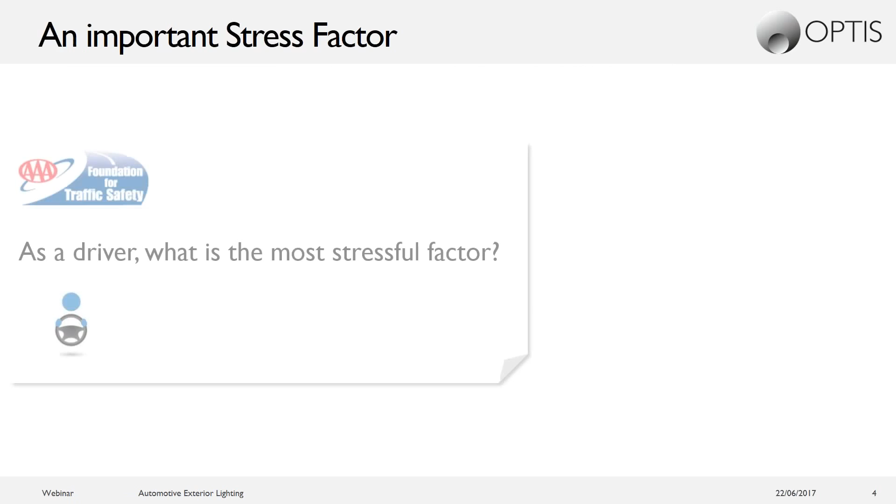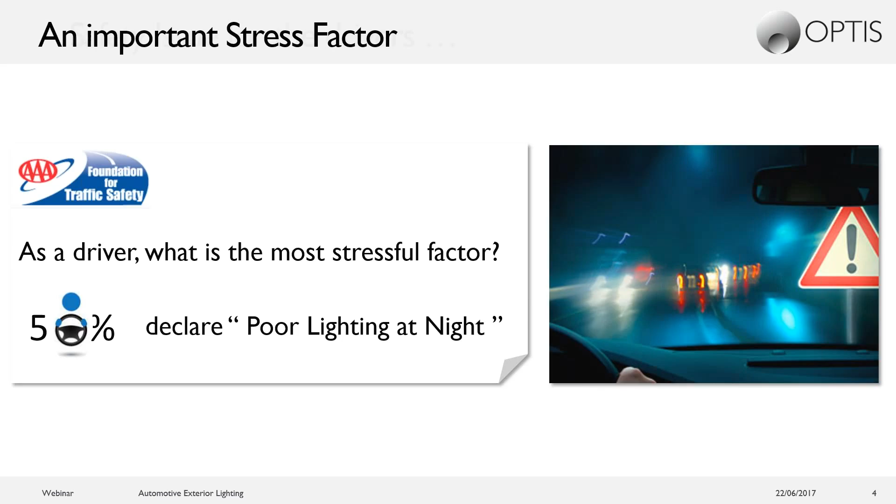Night driving is an important stress factor. In a recent American driving survey, to the question, what is the main stressful factor for you on the road, still 50% of the drivers mentioned that the first and most stressful factor is the poor lighting at night. So intelligent, innovative exterior lighting systems need to bring comfort at night. Exterior lighting has to answer to the huge safety issue that night driving still represents nowadays.

National Highway Traffic Safety Administration reports that only 20% of driving distances is undertaken at night, representing 2.4% of the traffic volume. But in this period, 40% of fatal and serious injuries are sustained by drivers. It's 4 of every 10 teen crash deaths that occur at night.

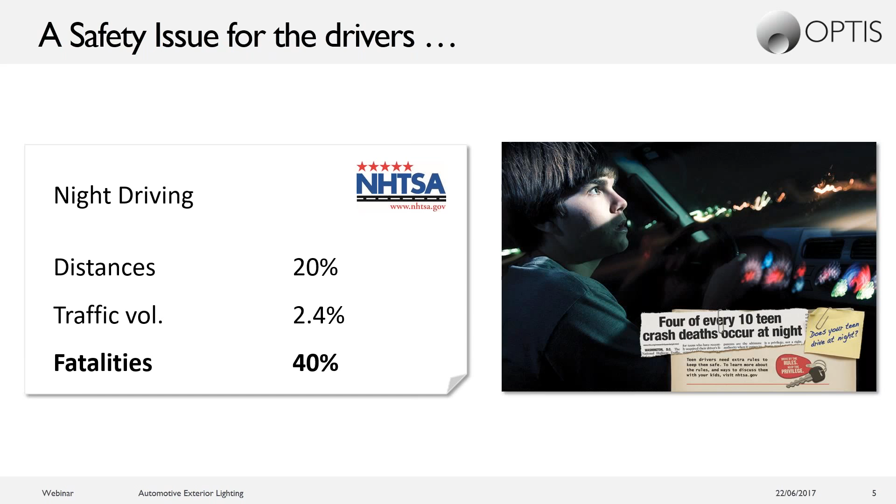Actually, the nighttime is a safety issue for all road users, especially the vulnerable road users, a heterogeneous group of pedestrians, cyclists, younger and elder, and disabled people. European studies have highlighted the strong effect of lighting levels on fatal crashes of vulnerable road users, being 3 to 7 times more vulnerable in the dark than in the daylight. So innovative automotive lighting needs to improve the safety of these vulnerable by communicating, by alerting, warning with lights.

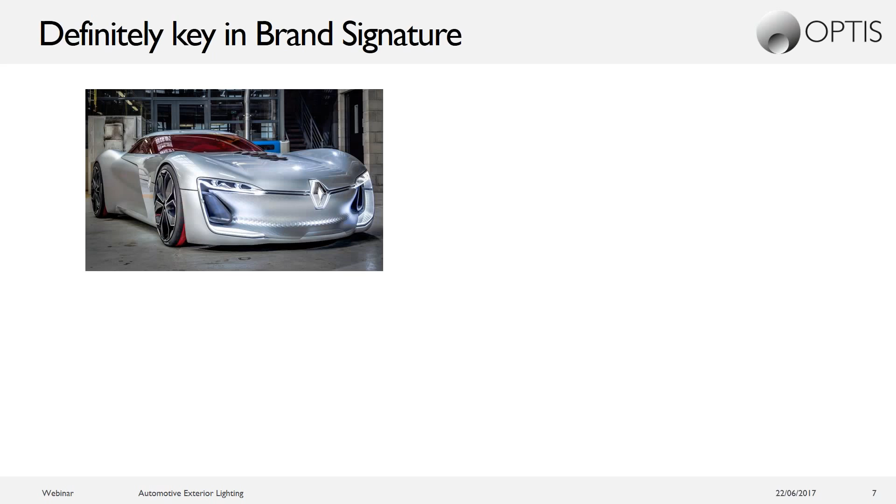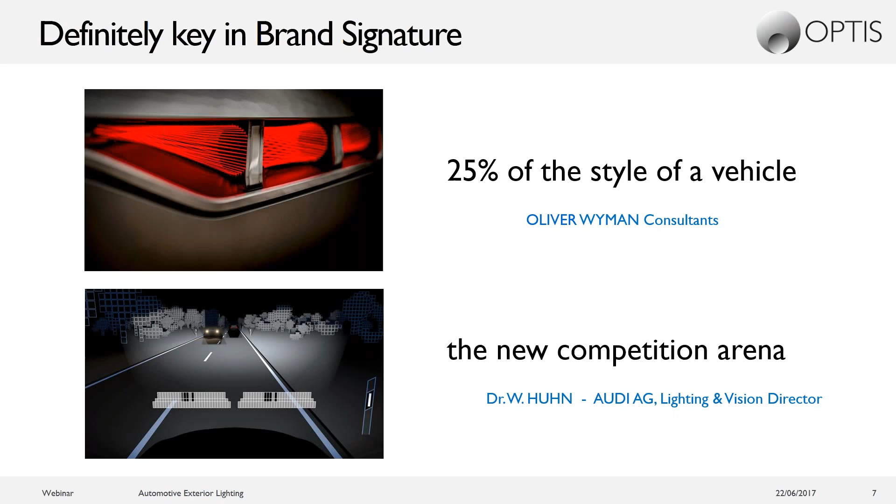Finally, exterior lighting represents also an aesthetic challenge. Exterior lighting reflects today the brand signature and a major impact on the customer perception, estimated to represent by itself 25% of the style of a vehicle. This is the new competition arena for car manufacturers and tier 1 suppliers. The competition is on shapes, on materials, light technologies, and their performances. The engineering development time is doubled at each headlamp generation. I will now let Julien, the manager of Automotive Exterior Lighting, go deeper into our solution to address all these challenges.

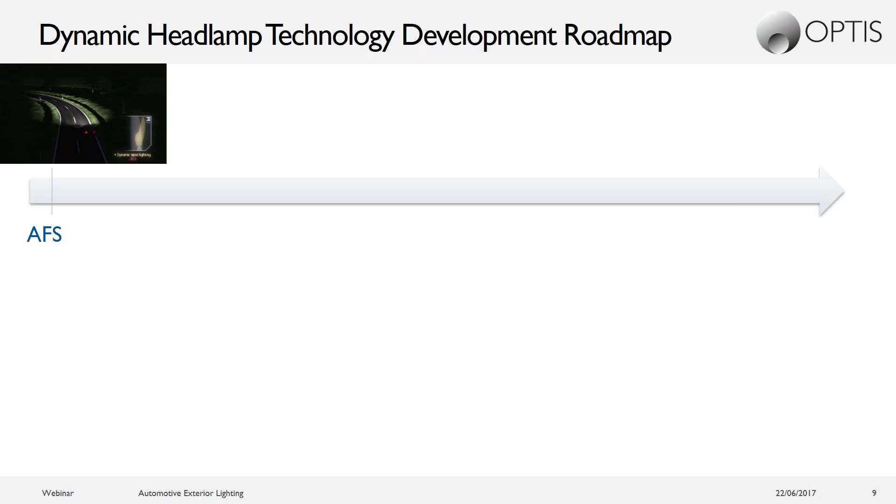So hello everyone. So today I will present you the pixel beam technology and evolutions, but first I will start with a brief overview about the last decade to look a little bit at the latest evolution in automotive lighting. So first I would say 50 years ago, or maybe even longer, with the first Citroën DS. It was the first AFS with a low beam turning with a steering wheel. This is still not a standard feature for all the cars, it's still proposed as an option on the high-range cars, but this allows a big improvement for the safety of the driver. So the idea is to add some light in the curve by using the steering wheel or the speed.

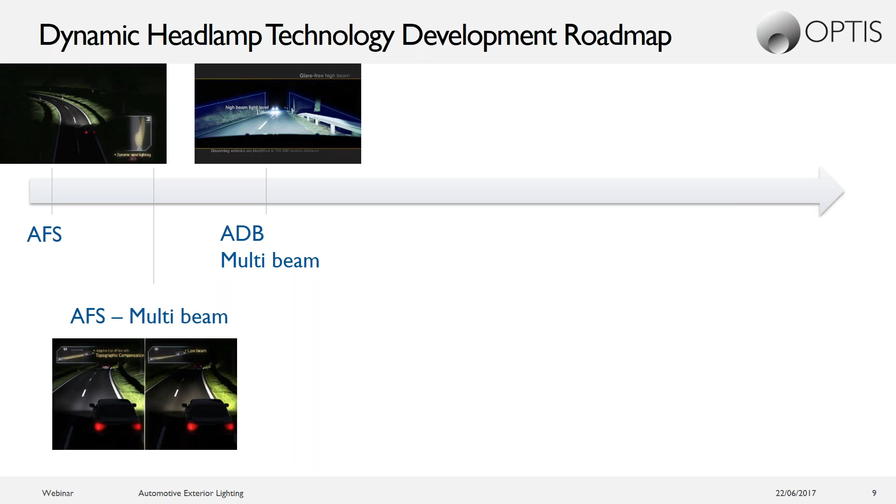Another solution could be also to add light depending on the condition, depending if you are driving on a motorway or if it is raining. You can adapt the lighting to have a better driving situation. And ultimately, you can have an adaptive driving beam, so we call it ADB. So the idea is to use the camera to control your lighting system. And at that time, with that technology, by using xenon or even LEDs, you have an L shape creating a dynamic shadow at the center to avoid glaring the oncoming driver or the preceding cars. So basically, all these three solutions are quite mature technology. It's based on mechanical movement, but it really allows automatic driving, so really to drive safely during the night.

Recently, we have seen the matrix beam coming thanks to LEDs, so you can add light even between the cars. So some pixels can be lit even between the cars, so you can put a lot of light everywhere. But you can still see some shadow on the road, so some light is still missing. Sometimes you need to switch off some pixels, whereas you want to put some light in between or around the car, near the car, something like this.

So now we need to consider the ADB based on pixel beam. So either with DMD, but a solution using LCD is also relevant for that. So the idea is to increase the number of pixels. So instead of, say, hundreds of LEDs, now we can consider hundreds, thousands of pixels, or even millions of pixels.

So this is, I would say, the HD or retina lighting for automotive lighting. And another technology also which is considered for the future or under development is to use MEMS. So MEMS is a mechanical scanning mirror. It's really a small micro mirror using a laser source. And the idea is really to control the scanning mirror to print an image either on the phosphor or directly on the road with an RGB laser source. We'll see that later in the next video.

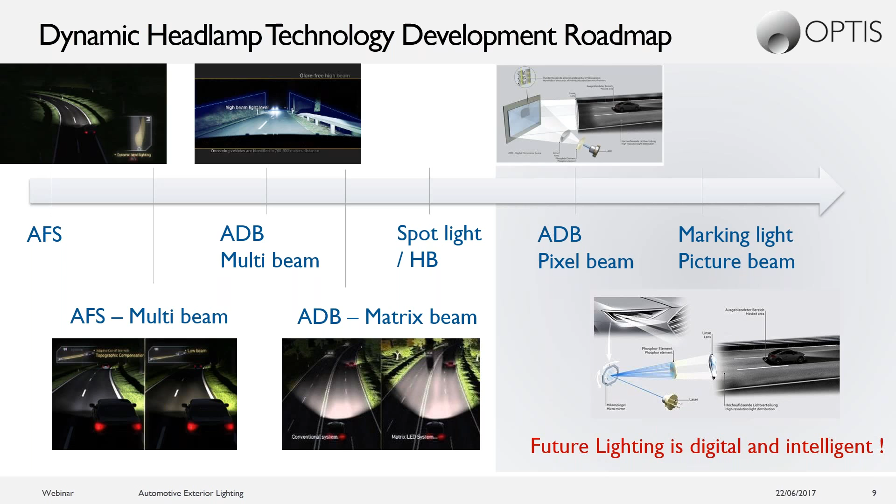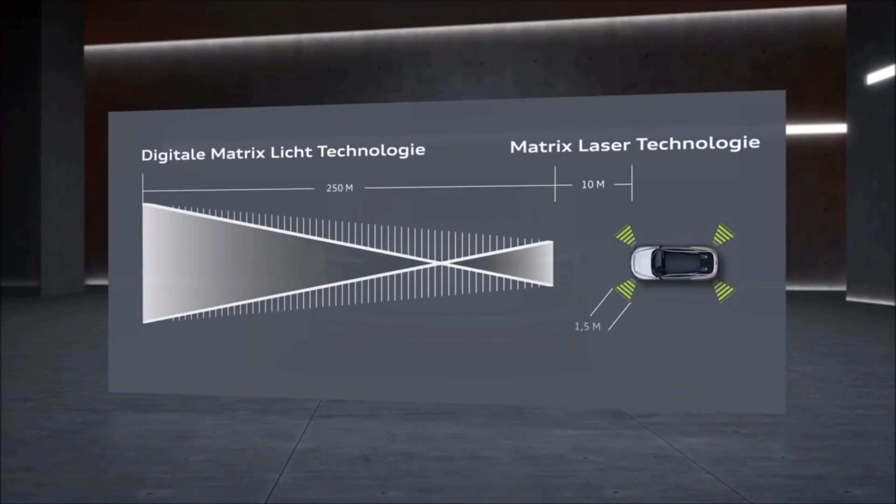Here just a brief overview of the Audi e-tron concept, the Sportback 2017 concept, with some technologies showing. This is quite interesting for understanding the technology by combining LEDs and laser. So you can see that the matrix laser is used here. So it's based on a MEMS, and this is quite useful to have car-to-car communication or car-to-pedestrian communication to show some warning information.

If we are now going back to the headlights, we can see that that technology allows to display whatever you want. So that's why we call it sometimes a picture beam, because any pictures can be shown on the road. So you can have a precise dimming, you can project some lines, you can create some shadows, etc.

So the other video I want to show you, which is coming from Mercedes in that case, is a digital light concept. It's more practical use cases. They can show some crosswalk, some road signs. They can also display some lanes to control the car in some dangerous situation. Navigation information could be also useful. Road signs again, and even a smiley can be presented.

If we are more looking to the top view on a realistic road, we can see how it works. And if you consider a rider, we can have a precise glare-free solution to avoid glaring the oncoming driver or rider, but we still put some light on him to be sure that we detect her, by the way.

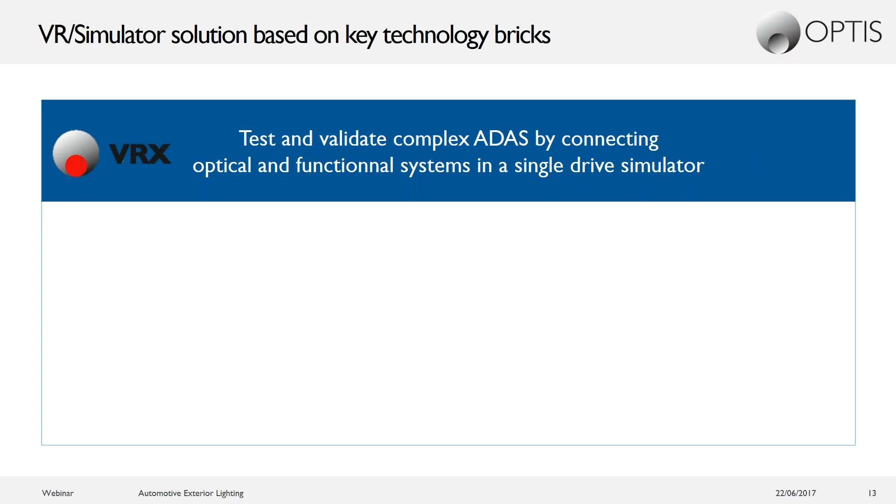So our solution for these use cases will be based on VRX. So VRX is a standard platform we have developed for virtual reality. So the idea is to have just one single drive simulator. This simulator is dedicated to the headlamp simulator for headlamps, ADB, matrix beam, or pixel beam. So we'll discuss that later.

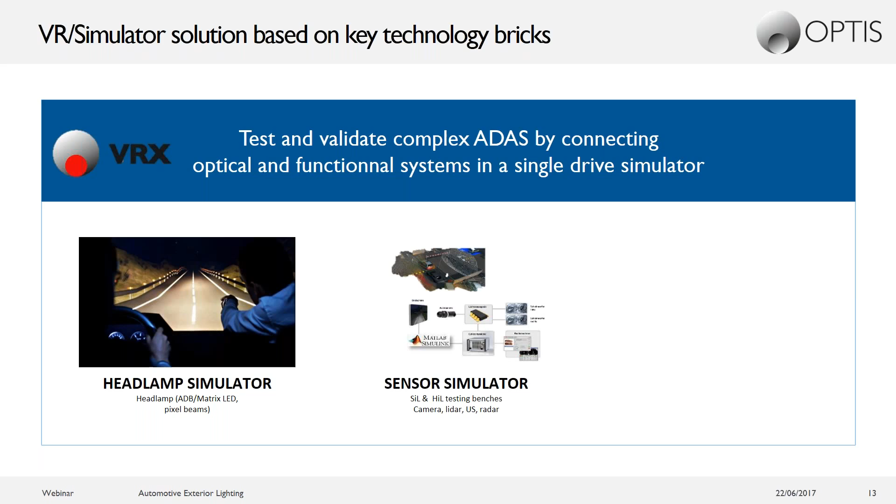This platform is also used for sensor simulation with software in the loop, model in the loop, hardware in the loop simulation of different sensors like camera, LiDAR, or ultrasonic. And this platform is also used for 3D immersive simulation, for ergonomics applications, for HMI evaluation studies to understand how the driver is reacting depending on the information you are displaying to him.

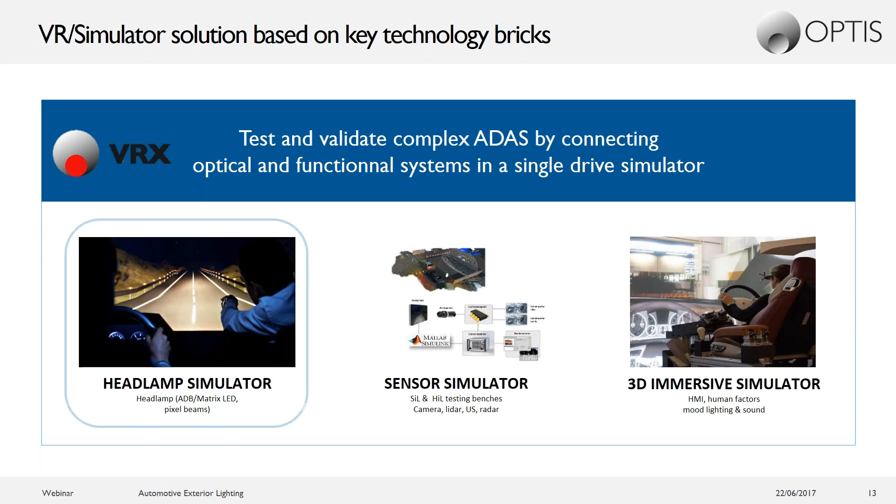So today we mainly focus on the headlamp simulator because this is our focus for exterior lighting. So what you have to keep in mind is first you need to define a track and a scenario. This is the first step. You need to define a specific trajectory of your car, a specific geometry of the roads, depending if you have some turns, if you have some mountains, if you're in the countryside, and some scenario. Do you have some pedestrians? Do you have some cars which are coming, which you are following?

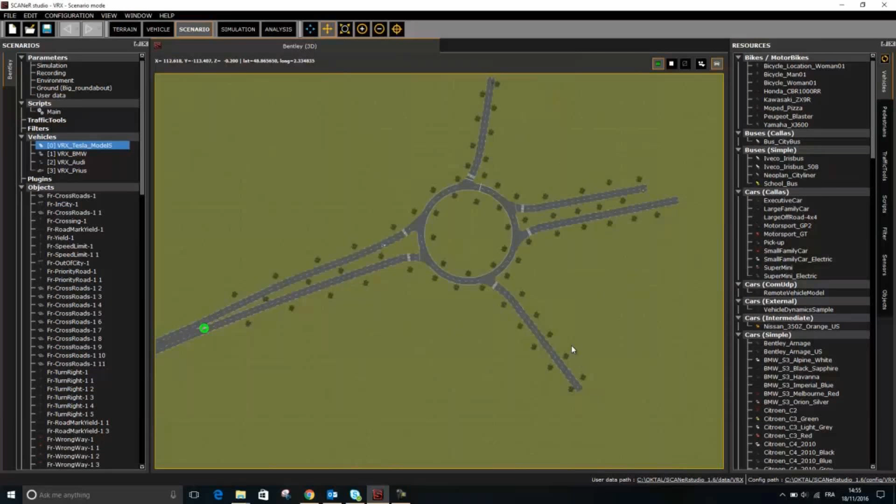So to achieve that, we have built a partnership with OKTAL. So we are using the software, which is well known on the market, to build some scenarios and some roads. So here it's an example of a roundabout. So this is a track, and we can put some cars on this roundabout, and they are controlled by SCANeR. So SCANeR is controlling the track and the car position, and inside the software, so here it is VRX, we can show the rendering by using our physics-based rendering.

Here it is during the day, but of course our focus will be more during the night. So we'll have a complex scenario during the night with an advanced vehicle dynamic simulation. And we can have some scripting of the different scenarios which are appearing during the night, so you can control the position of the cars, when it's starting, when it's braking, any complex scenario. So that's the solution for the scenario.

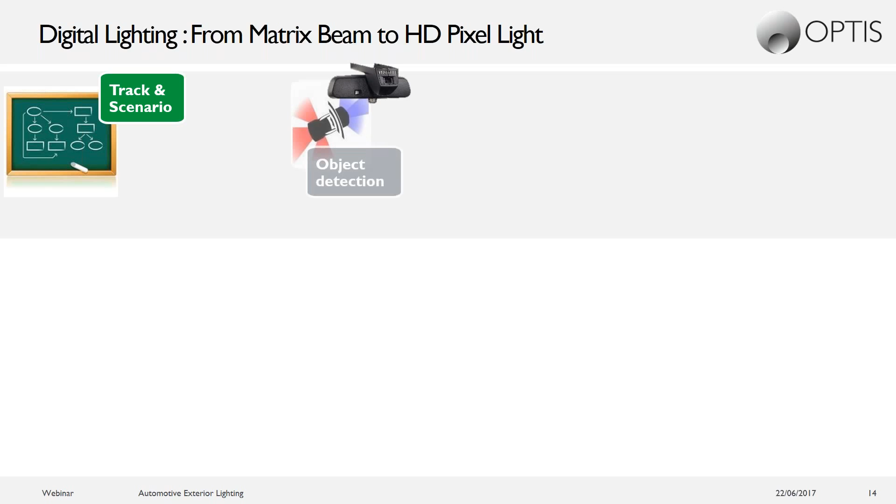And now we can focus on the object detection with the camera, the image processing thanks to the AFLS or ECU of the car body to control the headlamps.

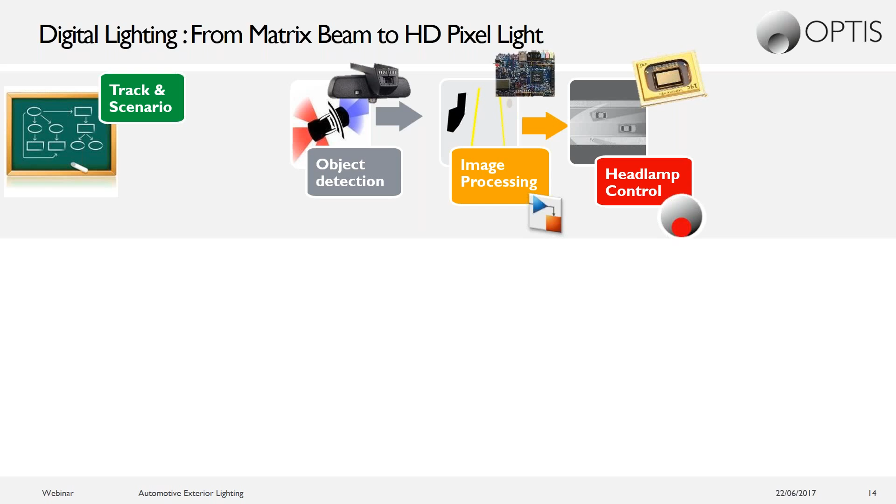So to control the headlamps could be either to control the LED driver, to control the dimming of the LEDs, the power output of the LEDs, or to control the MEMS or DMD output. So first, I want to remind you that VRX can be used for the conventional matrix beam, which is the right solution if you want to have between 4 and 200 pixels on the road, meaning 4 to 200 LEDs.

On your board. So in that case, here we have an example of a scenario. We are driving, we have just crossed a car, there is a car preceding us, and at the top we can see a graph. This graphic shows the percentage of light we are putting on the road. It adapts in real time because behind it there is a real-time simulation controlling the headlamps.

This is in combination with MATLAB Simulink, so you can do model-in-the-loop evaluation. You can change your parameters and evaluate their impact on the performance, on the quantity of light you are putting on the road. You can also evaluate the glare generated on oncoming drivers or following cars, so you can adapt your parameters to have the best compromise between safety and comfort for the driver. I will present that later in the live demo, but this is just a first introduction.

And the next technology coming is pixel beam. Pixel beam is really between 1,000 and 2 million pixels; LEDs are not a good solution here. The only way to achieve that is not LEDs but DMD, or even LCD could be a good solution. But MEMS can also be simulated thanks to our technology.

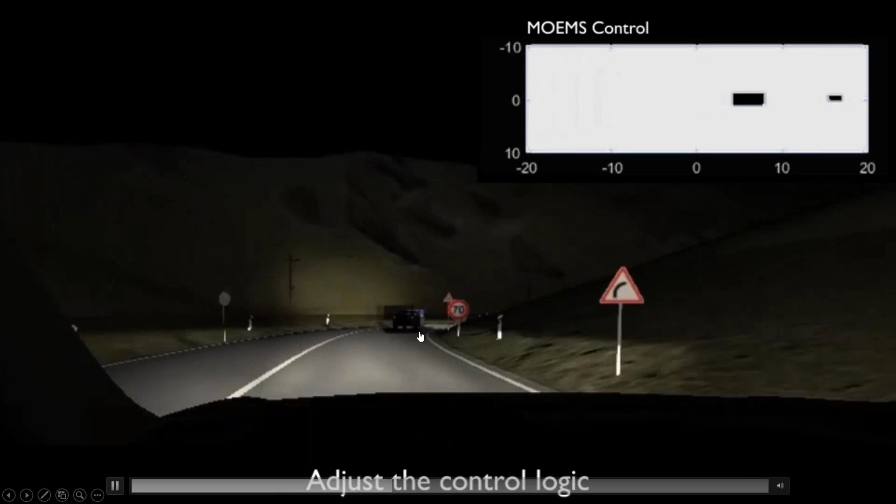So here is a short video to explain how it works. We are following some cars. This is the same scenario as before, but you can see that in real time we are creating shadows around the objects coming in front of us. The motorcycle or the car in front of us are tracked and recognized by the camera, and we are creating a shadow just in front of them.

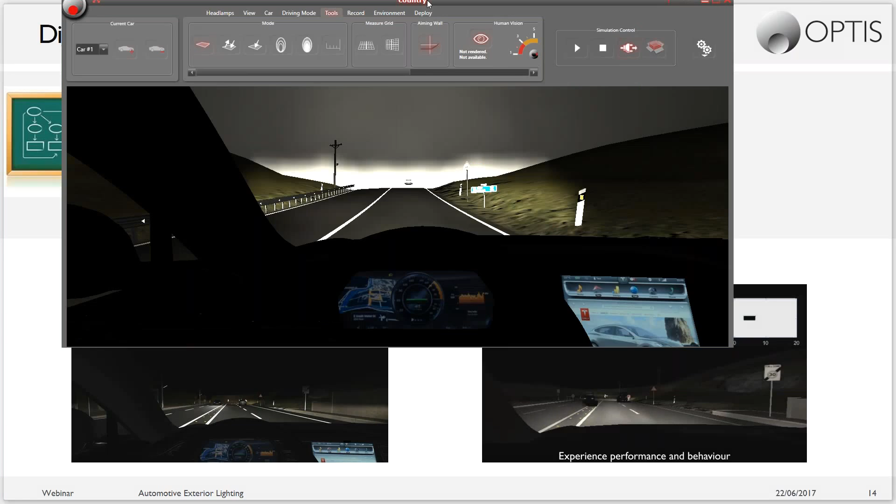So this is just a first idea of what we can do, but I want to show you a live demo of how it works. I will switch to VRX, which is our software for virtual driving. This simulation contains 2 cars, and the idea is to control this car's behavior with a MATLAB Simulink model. This is the MATLAB Simulink model I will use for the demo.

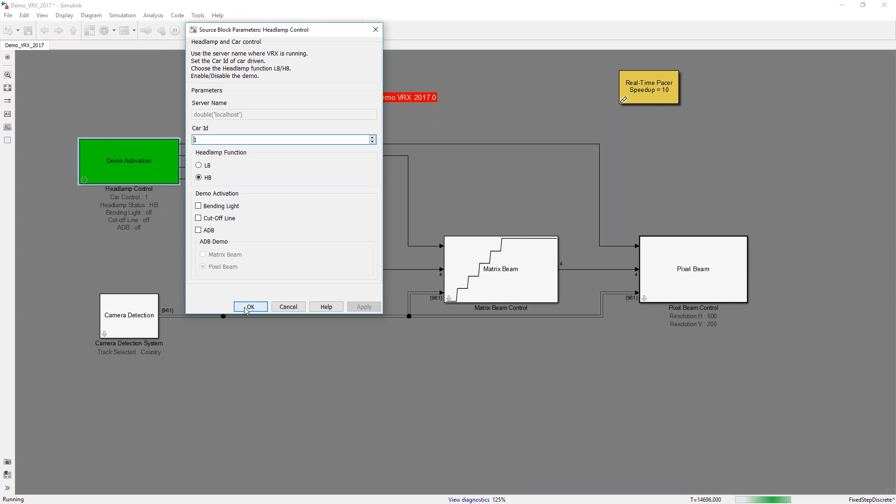The headlamps are controlled through that block. I can control the activation of low beam and high beam, and I can activate different intelligent lighting functions, which you will see later. Then I have different parameters to control the camera, such as camera position or field of view. I can control the bending light position and the max angles.

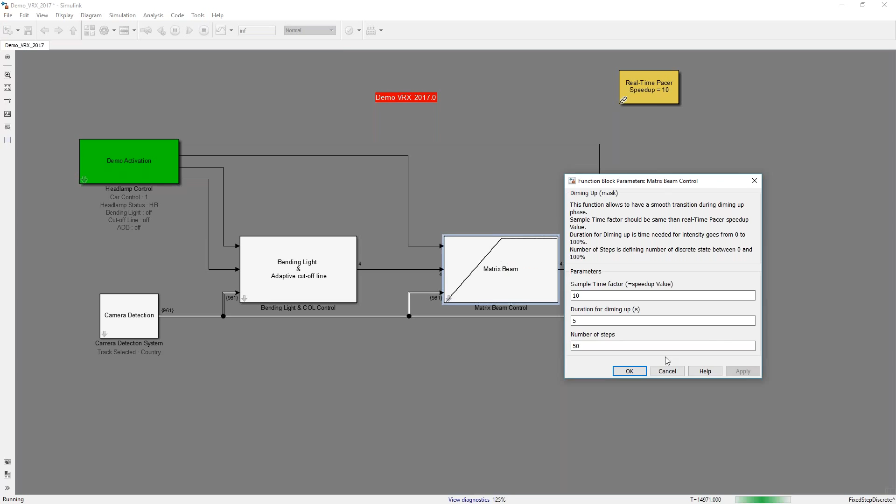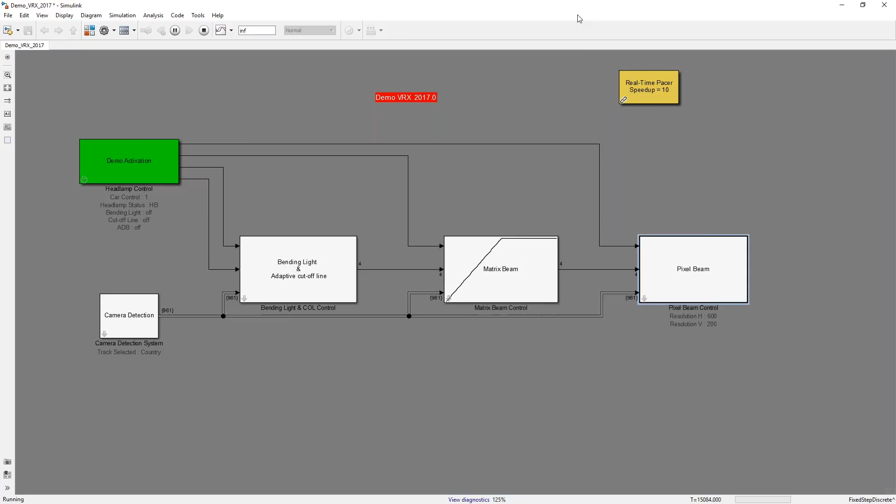For matrix beam, I can control the dimming up. You can see this curve; this is the percentage of dimming up over time. I can add more steps to have something smoother. The curve is automatically updated, and it will be the same in VRX. And of course, I have the possibility to have a pixel beam, where the key points are the field of view and the resolution. So I will hide this model and show you live how it works.

In this situation, we are in high beam, so of course we are glaring the preceding car. The best way in that condition would be to be in low beam. I have put an aiming wall to show the beam pattern and understand how it works. Now, if I activate the ADB, the matrix beam, with the Simulink model, you can see that I'm adding some light. If I'm driving, I can see light being added around the car.

I will just pause here. You can see that this car is now glared by my matrix beam. This is actually because it is glared by the low beam. If I switch back to low beam, you can see the car is glared by my low beam. So we have implemented an adaptive cutoff algorithm to adapt the cutoff position depending on the car position.

So I will start the demonstration again with the ADB activated in high beam, and you can see that the low beam is actually adapting vertically to the car position. In that case, you are putting light just at the right position relative to the car. And finally, the last point I want to show you is, of course, the pixel beam.

So you can see that in that case, the light is put everywhere except on the car. So again, I will switch between the matrix beam with cutoff adjustment and with the pixel beam. And with pixel beam, you can see that you are putting some light everywhere except on the car. So this is quite fantastic technology. And of course, it's working in real time.

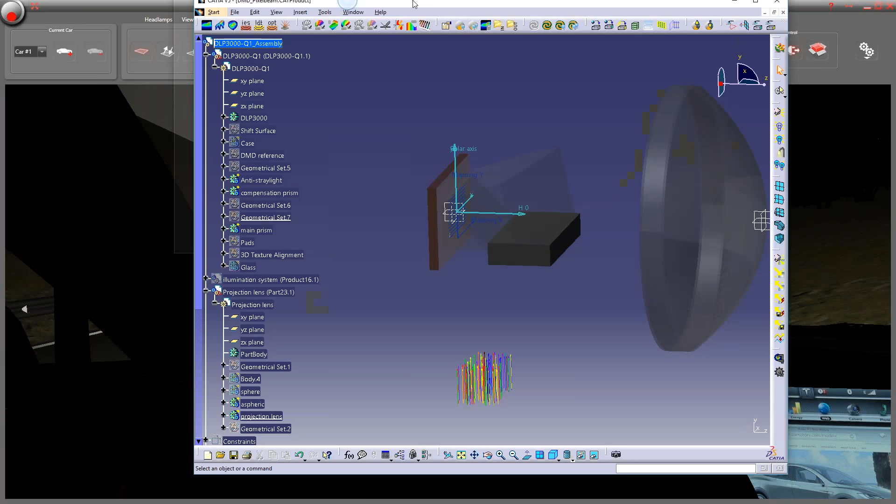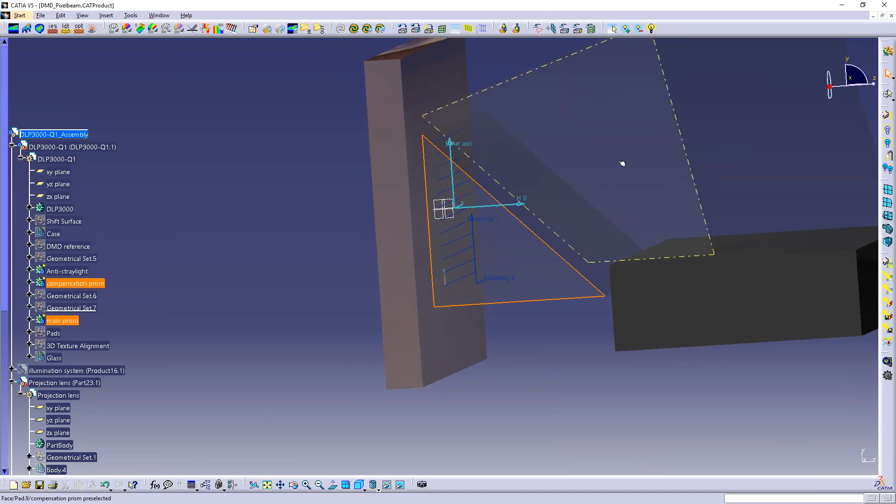Maybe you are wondering how it works for the optical definition of that, so how to create a shadow. In that case, we need to use Speos simulation. So this is Speos integrated in CATIA, and this is, I would say, a simple imaging system using a DMD. So this is a lighting source which is collimated, and the light is reflecting into that prism, arriving here at the MEMS. So this is a MEMS with a lot of micro mirrors. We will focus on that later. And then the light is reflecting into that compensation prism, and finally it's projecting through the lens.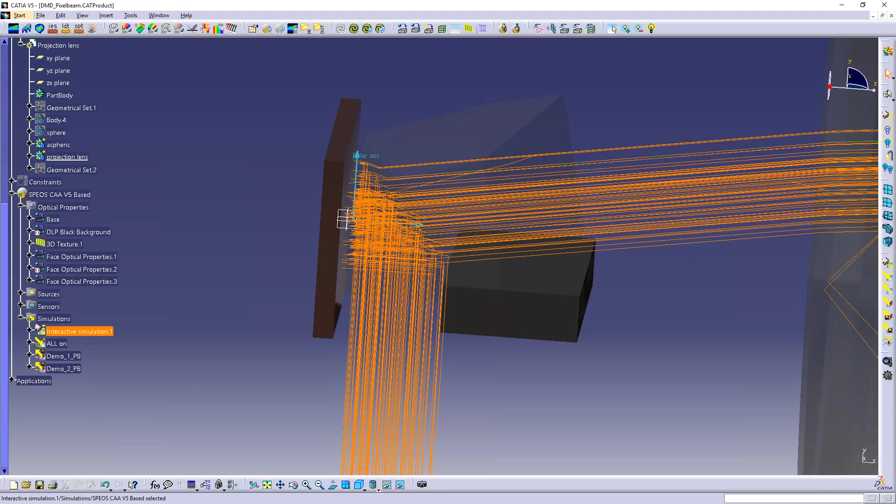So just to explain with some ray tracing, this is basically how it works. There are some reflections here, and the pixels which are off are actually going out of the definition. So I will just hide that. I will also hide the prism, just to focus closely on the MEMS to explain how it works. So that's the MEMS status. I have just shown some pixels of the MEMS.

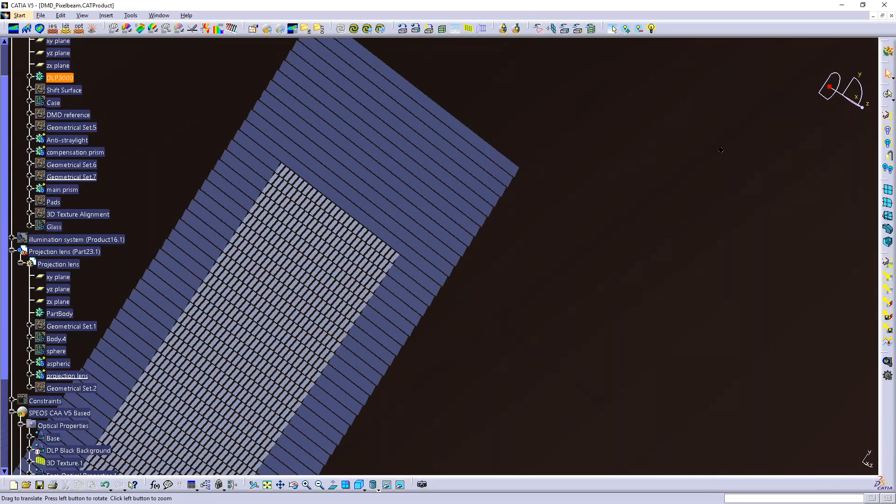So the MEMS here is composed of 1 million mirrors, but here I'm just looking at a few of them. Oops, sorry.

So you can see that in that case, only this square is switched on. And the key point is I can control this situation just by using a small MATLAB script. So the idea is again to adapt the configuration of your DMD in Speos based on the simulation. So in that case, I will just run the MATLAB Simulink update. You will see that I will generate another configuration of my pixels.

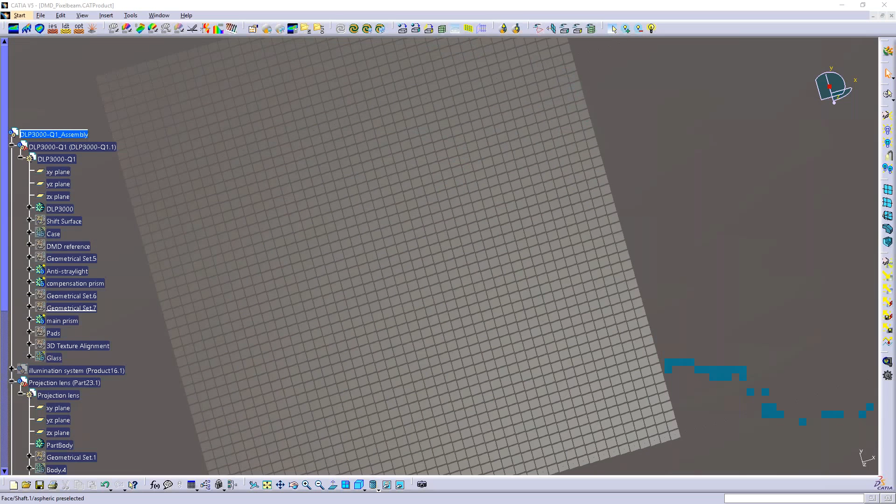So now you can see that all the micro mirrors are slightly shifted in another direction. Again, just to have a closer look. And of course, we can run a Speos simulation to have the result of that, and I will show you. Just wait for the update. Now it's updating the graphics. So you can see that in this configuration, we are just creating one shadow on the square.

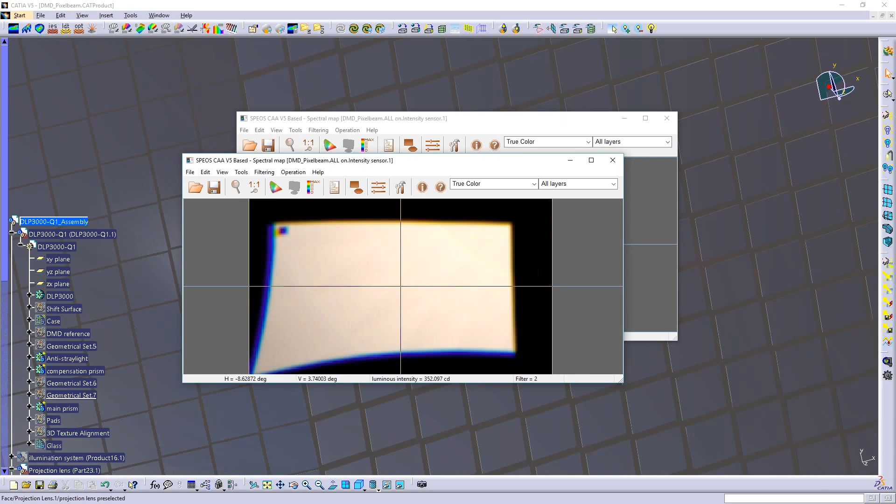So if we are looking at the result, the first result was just a quarter which is switched off. And you can see, thanks to Speos, the colorimetric aberration. Using the other definition, after the Speos simulation, we observe that this is just the square. So the key point is you can use Speos to have the precise simulation. Thanks to Speos, you can simulate the colorimetric aberration you can see here. Maybe you expect to have a really dark area, but this is not really dark because you will have some colorimetric aberration, and you also have some distortion.

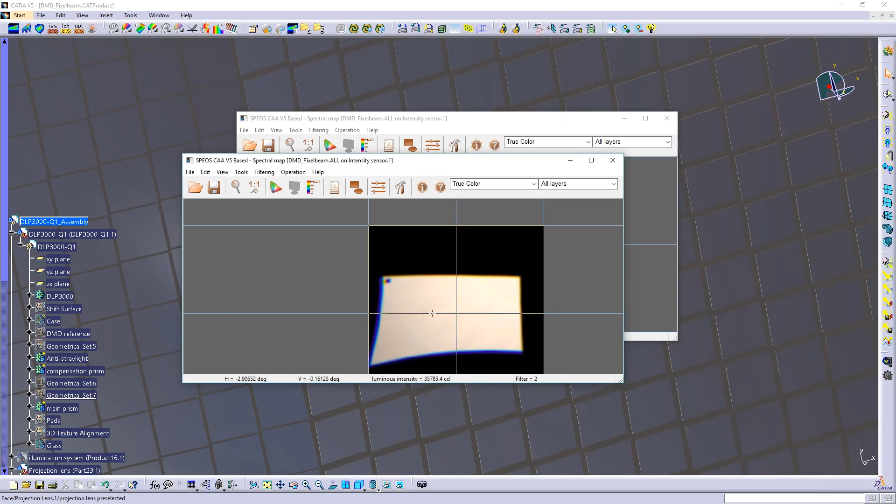So the message here is Speos needs to be used by the optical engineer to design the optical concept to achieve the best quality of light, whereas VRX is used by the system engineer. So the system engineer can evaluate any idea for the pixel beam, for example. Any idea can be experienced in real time.

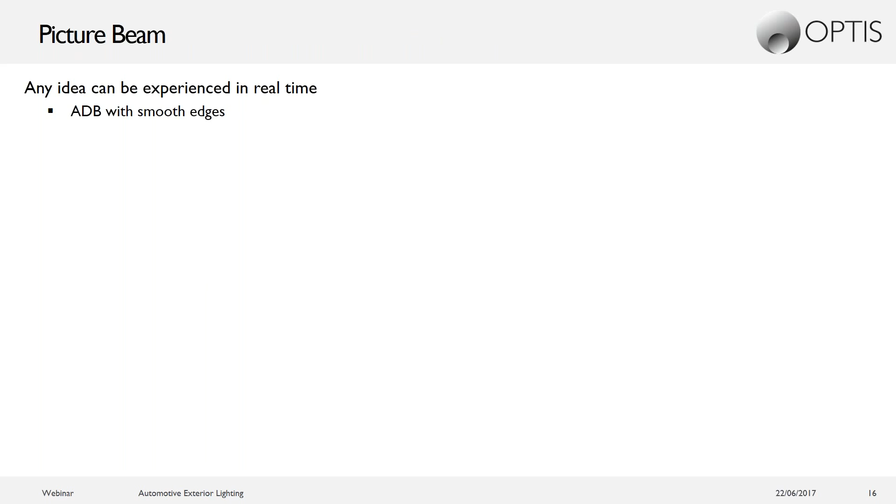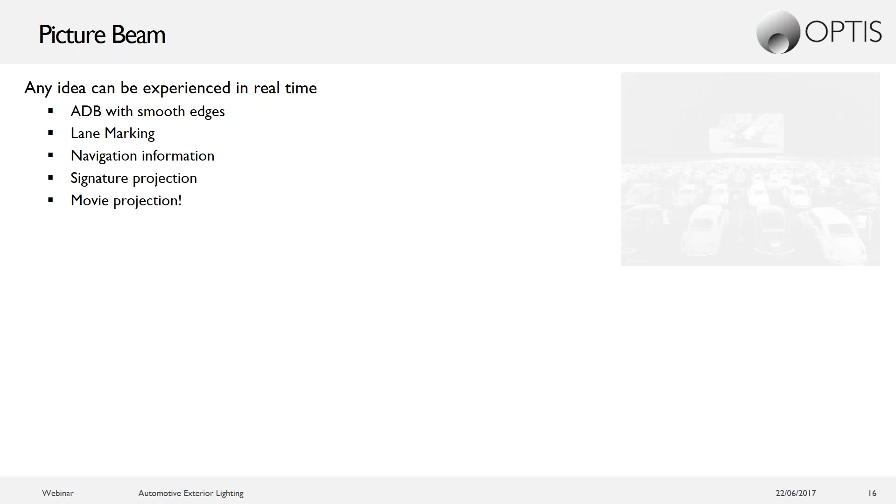We have seen today just a short demo, but ADB with smooth edges can be represented, lane marking, navigation information, as we have seen before, signature projection. You can project your logo, you can project some innovative welcome light when you arrive at home. And of course, movie projection can be presented as well. Maybe not like this, but Mickey can be presented on the screen. So this is just a proof of concept to explain what we can do with VRX.

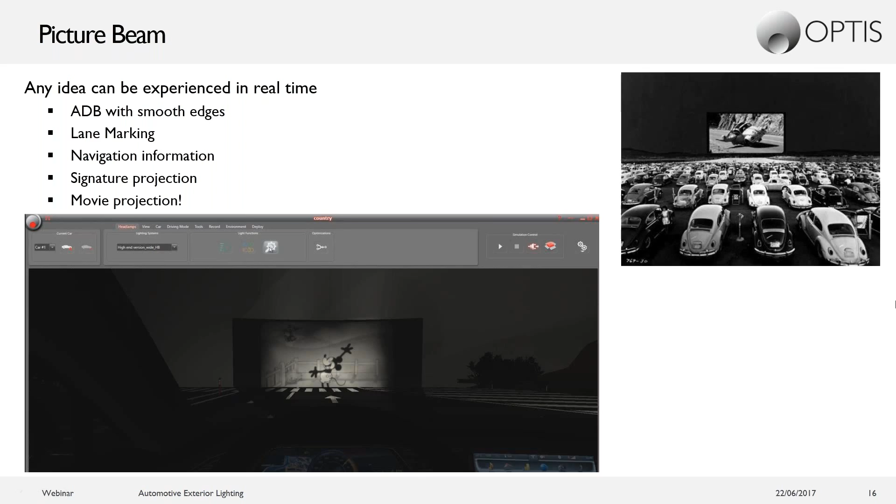So this is running in real time, so you can test your idea in real time. So as business benefits, our innovation can be tested. It can be tested in the early demonstration, so really some months before the first prototype. You can play with the simulation, with the model, to find the right parameters. You can define your brand image, so find the best way to sell your car or your project. And of course, we also have some ratings and reports available inside our software.

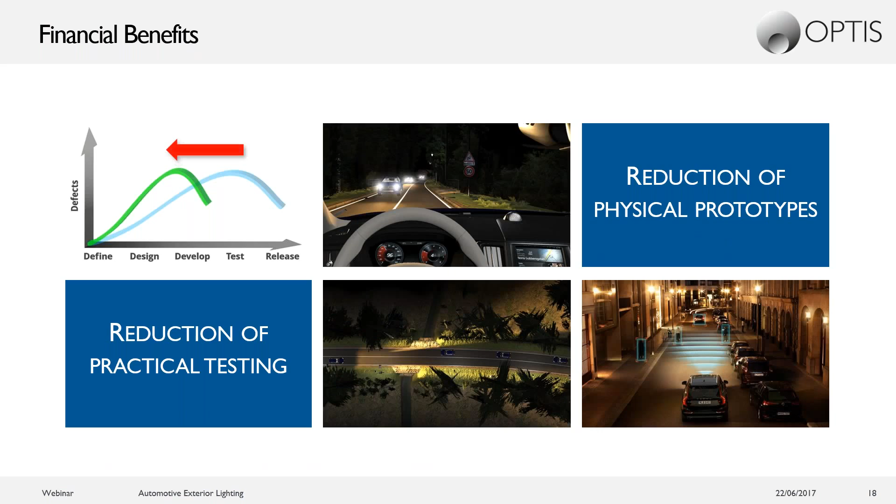Regarding the financial impact, as we are reducing the number of physical prototypes and also the number of tests, you can save some time and money thanks to our solution. And finally, for engineers and managers to understand how it works, we are based on a physics-based rendering engine. So it's something you can trust. It's close to reality. We have done some certification of our Speos solution, so you can trust the result.

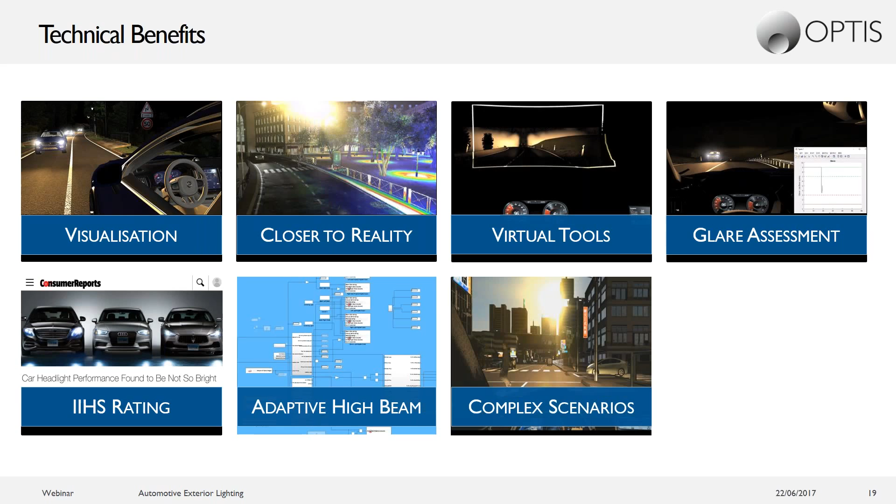We have some virtual tools to assess the light and the glare, for example. IIHS rating is another topic, but we are supporting that. Of course, all the adaptive beams can be supported as we have seen today, so any complex MATLAB Simulink model can be tested in real time in our solution. Thanks to our partnerships, our co-simulation with other platforms, complex scenarios can be evaluated, and we are already delivering some libraries of scenarios to test your things. So that's our solution, and I will give back the mic to Cedric.

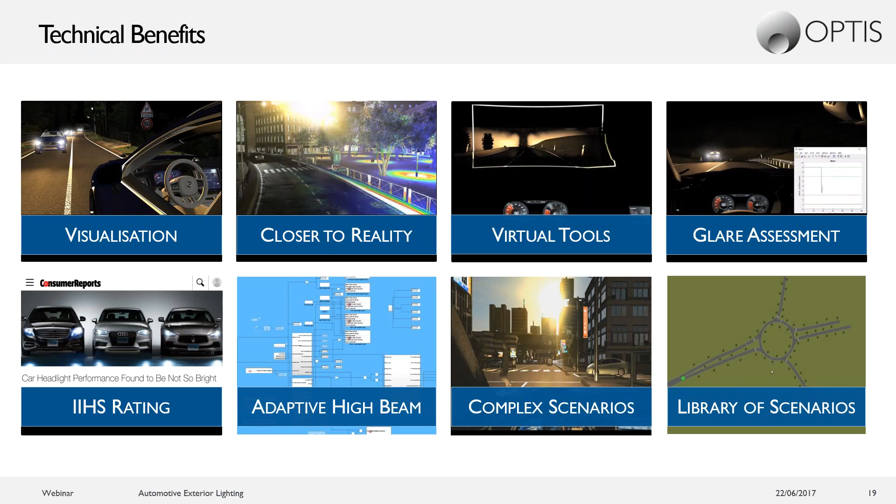Thank you, Julien, for this very interesting demonstration. Live demo is always appreciated. Yeah, so I wanted to finish off on our vision.

What we do is enable our partners in delivering innovative designs that have been tested and optimized for their final customers. We assist our partners in many aspects of the design and engineering process, including safety, ergonomics, and perceived quality. This translates to several topics: color and material choice and uniformity, human-machine interface development, interior lighting, intelligent exterior lighting, as we have seen with Julien, and the current hot topics of HUD and globally ADAS, advanced driver assistance systems, and autonomous driving.

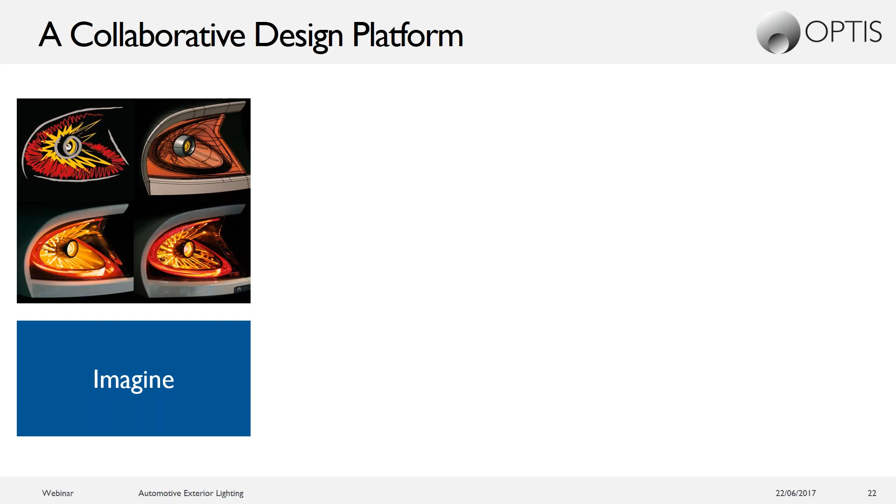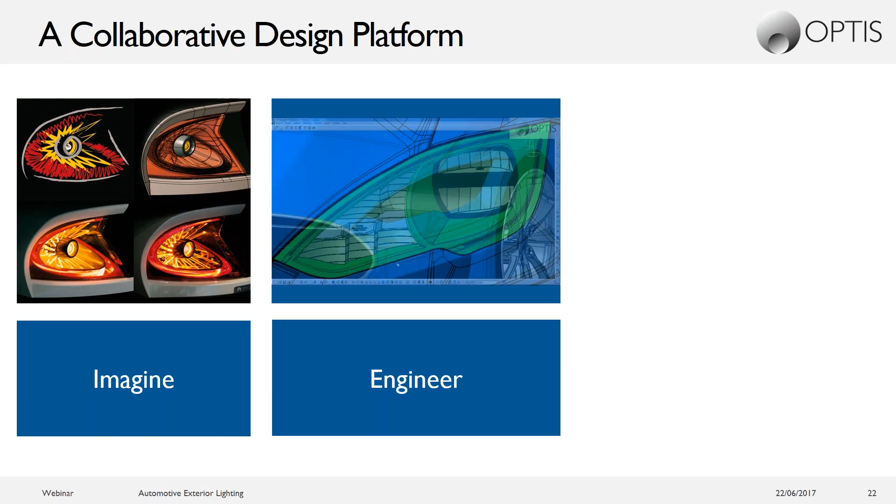The OPTIS proposal is a powerful collaborative design platform. Boost your creativity on CAD or mesh data. Imagine and test any materials, any colors, any lighting scenario in usage context under realistic exterior lighting conditions. Then engineer your creation. Take advantage of CAD PLM integrated and dedicated tools to design the lighting systems, from light guides to matrix beam or pixel beam, using LED sources or MEMS from the market.

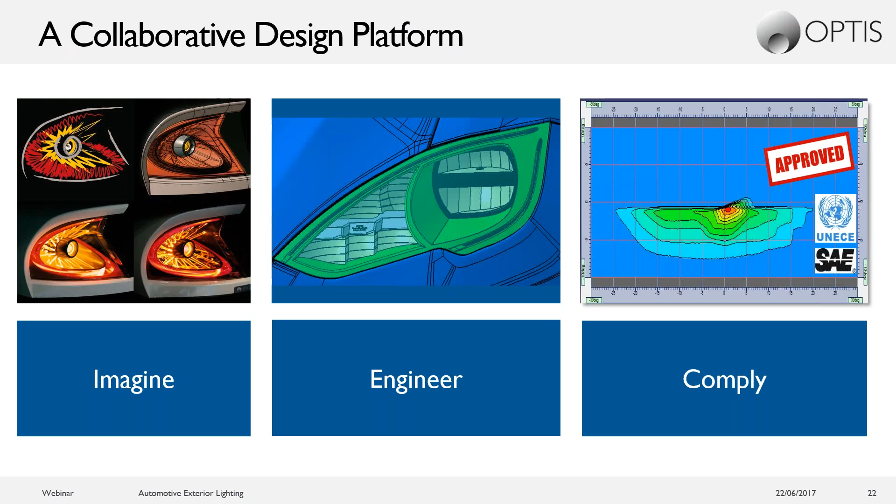Share with your business partners while keeping IP totally secure. And finally, take advantage of scientific but easy to use analysis tools to check compliance with the regulations. With the OPTIS virtual prototyping solutions, you certify your system in virtual, saving you time and money. The key difference of the OPTIS proposal is that our powerful design platform offers a tangible decision making solution. Don't wait until it's too late for the surprise of bad Consumer Reports or JD Power ratings.

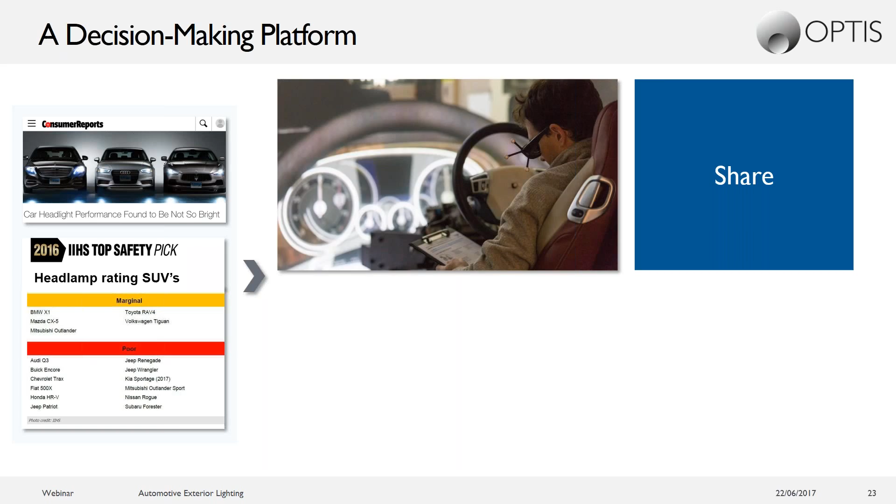In 2016, almost every auto manufacturer failed exterior lighting tests in North America. Even the performances of Audi and BMW are not so bright. So with OPTIS, you create a virtual prototype, and from the beginning, you share a scale 1, true-to-life experience in virtual reality with the decision makers, with your customers.

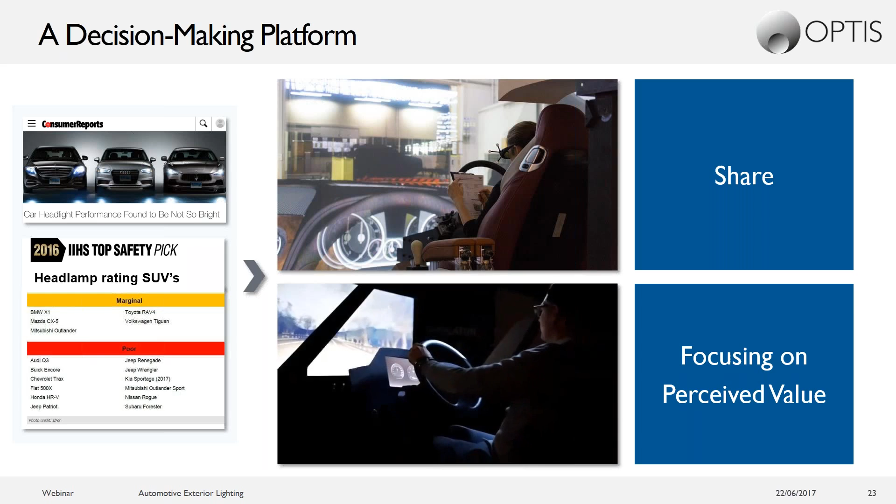First, you improve the collaboration, the concurrent engineering among the different teams internally and among the business partners, OEMs with suppliers. Secondly, listen to the voice of the customers. From the early concept phase and throughout the development, focus on the perceived value of your innovation. Bring the value where it is most appreciated by the targeted consumer.

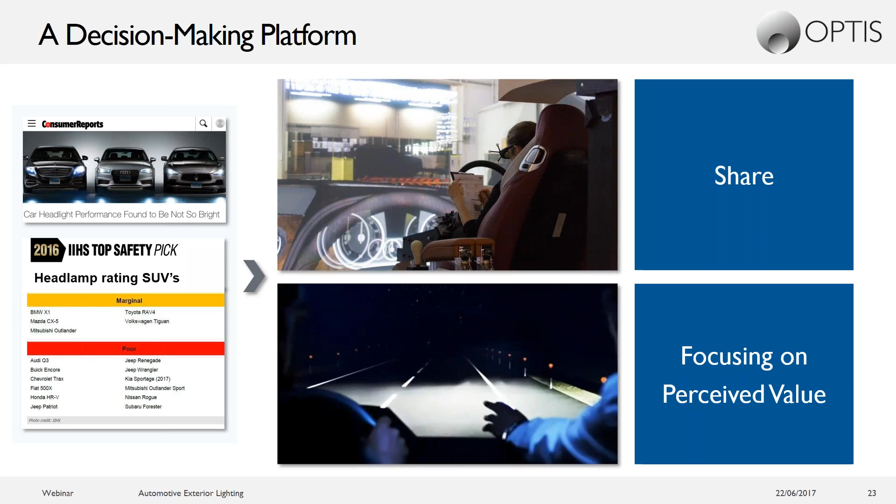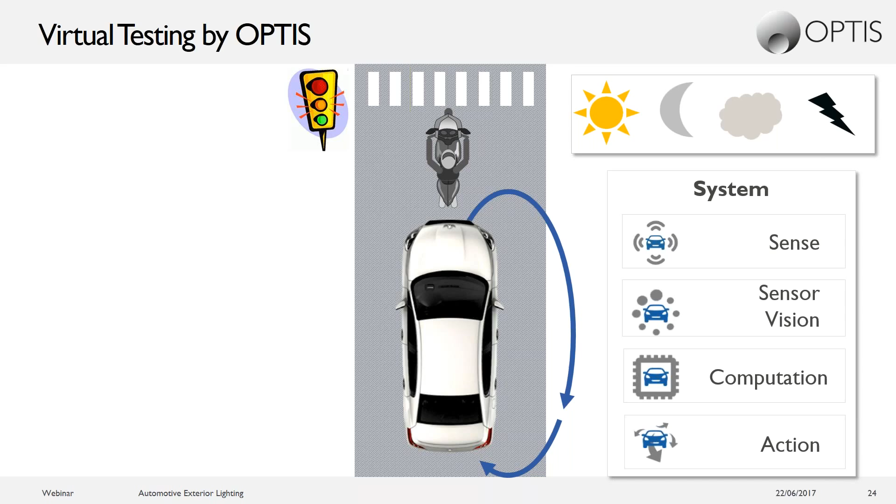Let's focus quickly on virtual testing, because this is key in our solution, and it's very promising. It's a must-have for ADAS and new generation headlamp system developers. So first, the environment, which is critical. Environment, weather, lighting conditions are perfectly reproduced, as well as the roads, the markings, the other vehicles and pedestrians. Diverse traffic lights can also be reproduced. Then the two workflows, the vehicle HMI and the embedded intelligent sensor system, are simulated using physics-based modeling.

We will simulate the HMI as the system and the sensor vision. With ADAS and all the advanced driver assistance systems and innovative headlamp systems, there is now a shared control between the driver and automation, a cohabitation between two workflows. So the OPTIS Automotive Virtual Solution Platform is putting together the driver, the vehicle, and the environment in a lifelike experience, as the simulations are physics-based. And that's really the key of our proposal.